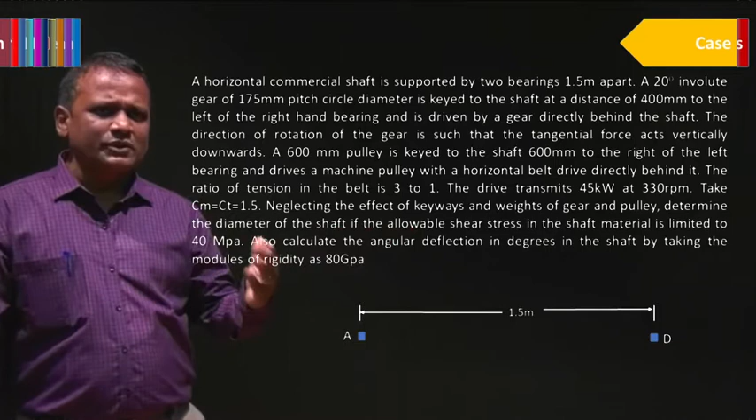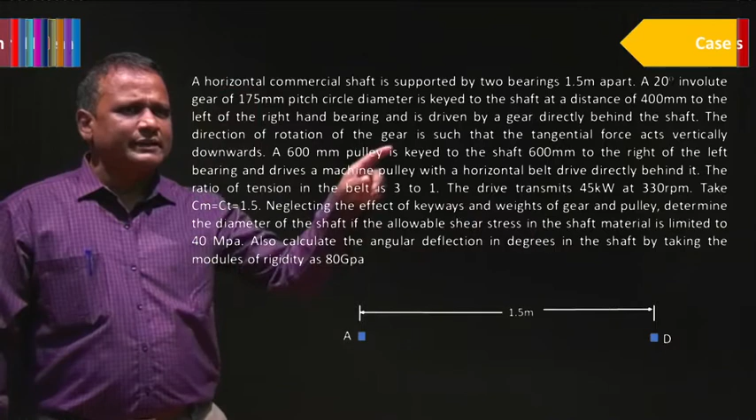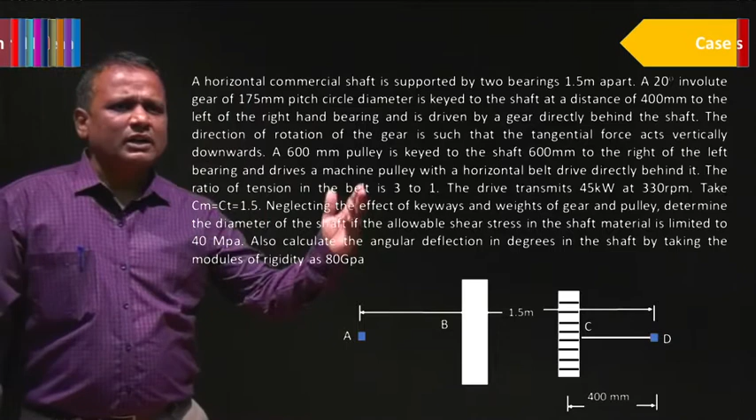Next, a 20-degree involute gear of 175 mm pitch circle diameter is keyed to the shaft at a distance of 400 mm to the left of the right hand side bearing. I consider this as the right side bearing, so to the left of that, around 400 mm, we have one gear. I call it gear C, at 400 mm. Further, a 600 mm pulley is keyed to the shaft 600 mm to the right of the left bearing.

I consider this as the left bearing, so to the right of it, the pulley is keyed at a distance of 600 mm. So whatever is left back would be 500 mm. Okay, so this is an initial sketch of the system.

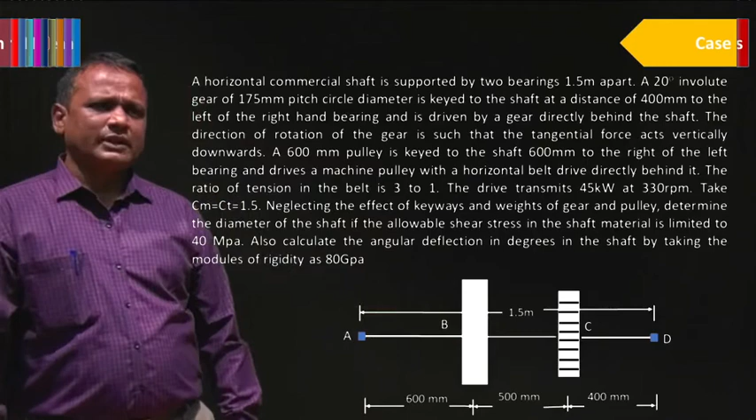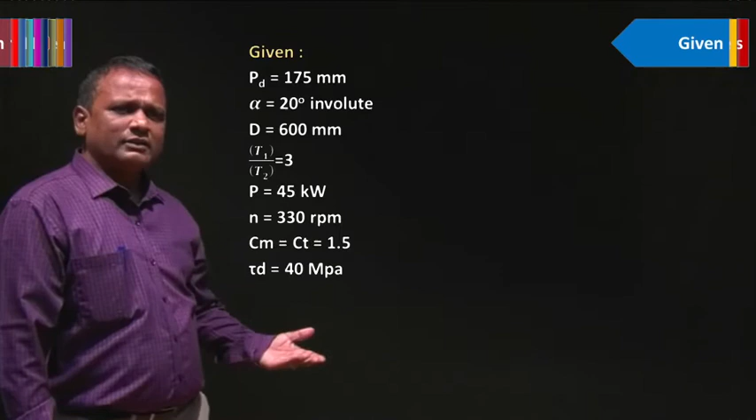Next, the givens: pitch circle diameter of the gear is 175 mm, alpha is 20-degree involute, and the diameter of the pulley is 600 mm. The tension ratio T1 by T2 is equal to 3. Power is given as 45 kilowatt and speed N is 330 rpm, with Cm and Ct equal to 1.5, tau D is 40 MPa, and G is 80 GPa. And what we need to find is D and theta.

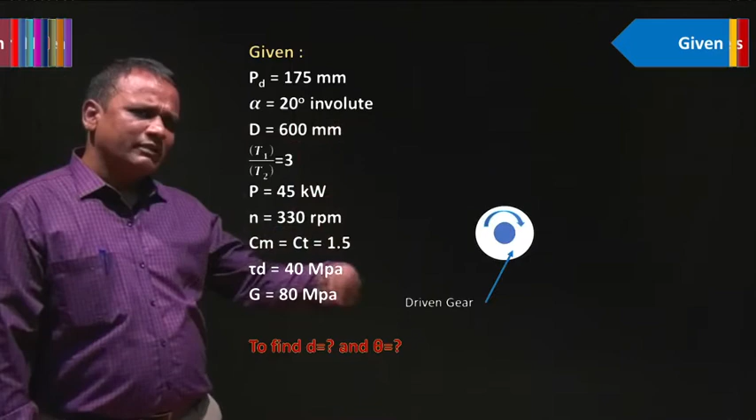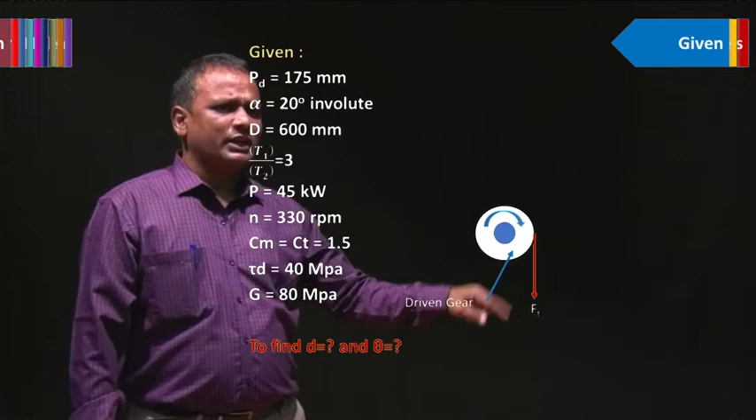Now, remembering the given data, I'll draw the side view showing the gear taking power, with the tangential force acting vertically downwards. It's a driven gear, the tangential force is vertically downwards, and correspondingly the radial force is towards the shaft.

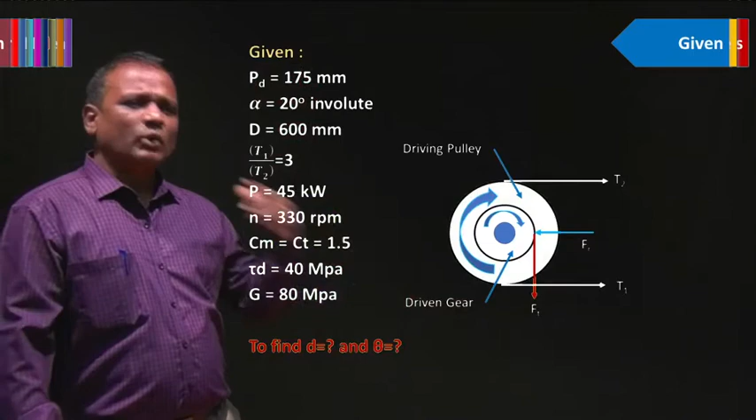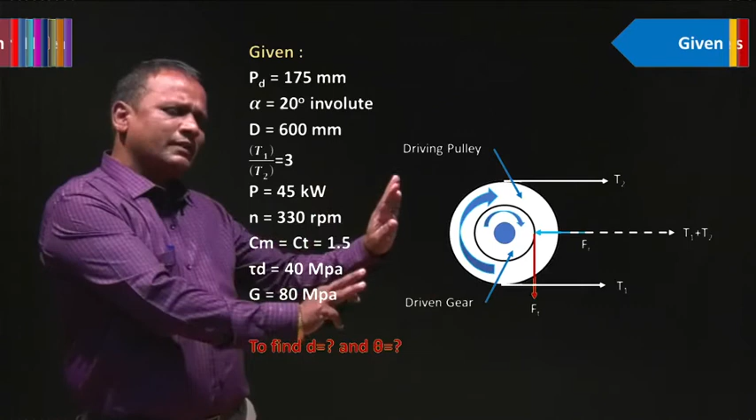Then I added a pulley delivering power to another pulley directly behind it, with tensions T1 and T2 respectively, and the summation of those two would be T1 plus T2. From this sketch we can conclude at least how many types of vertical forces we have, and what horizontal and vertical forces will exist in this case.

So next comes the solution. As I said, in deriving the diameter of a shaft, I use this particular equation based on maximum shear stress theory, from page number 43.

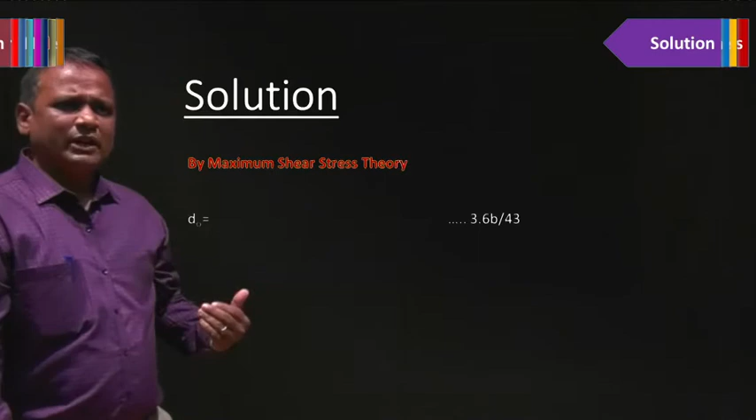So I am going to consider the maximum shear stress theory, equation 3.6b. I know D naught is equal to the same equation 3.6b of page number 43. And we know that for a solid shaft, K is equal to 0.

So remodulating this equation, what I got is this. This is the equation I am going to use in order to find out D. In fact, I will find out all the other unknown elements, where tau D is given, Cm is given, Ct is given, and I have to find what is M and T.

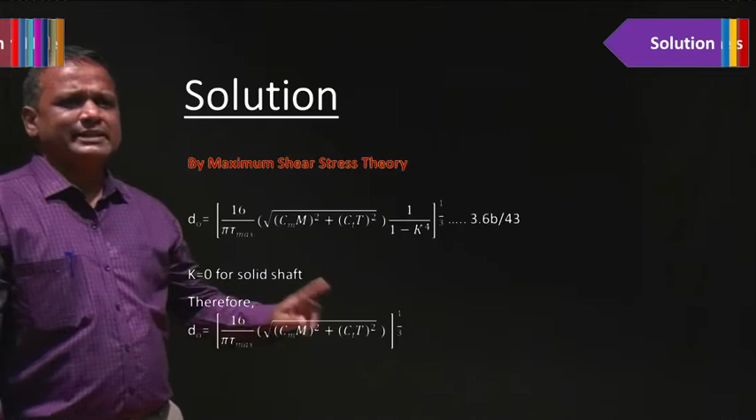So the next step is to find the torque. You know that from equation 3.3a of page 42, the same equation we used in our previous videos, it says 9.55 into 10 to the power of 6 into P divided by N. Kindly note, very important here, P needs to be substituted in terms of kilowatt.

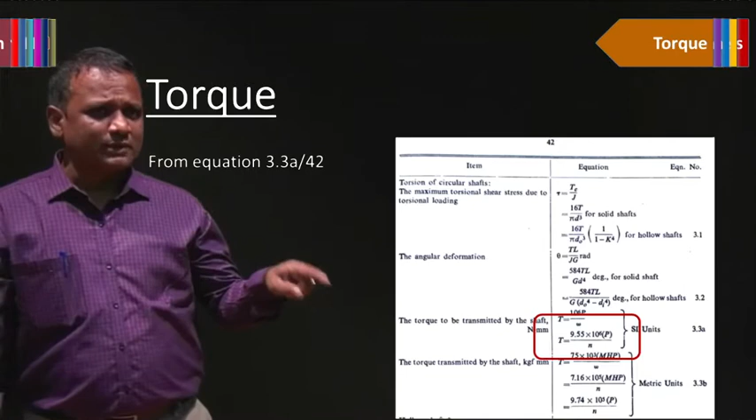So I'm going to pull down the same equation here. Now substituting everything into it, the torque that I got is 1302272.727 Newton mm for this case. So this is the torque.

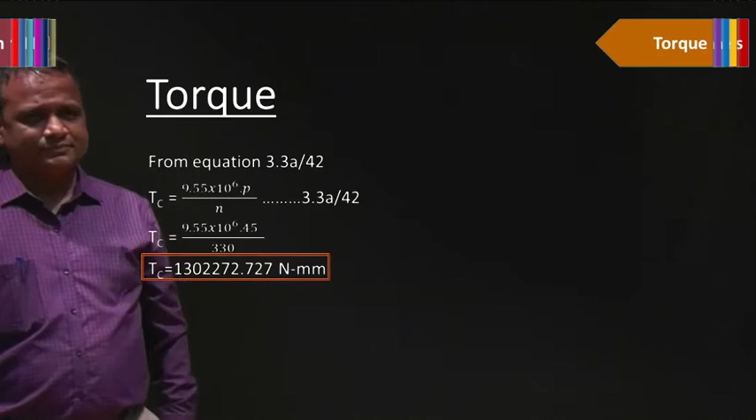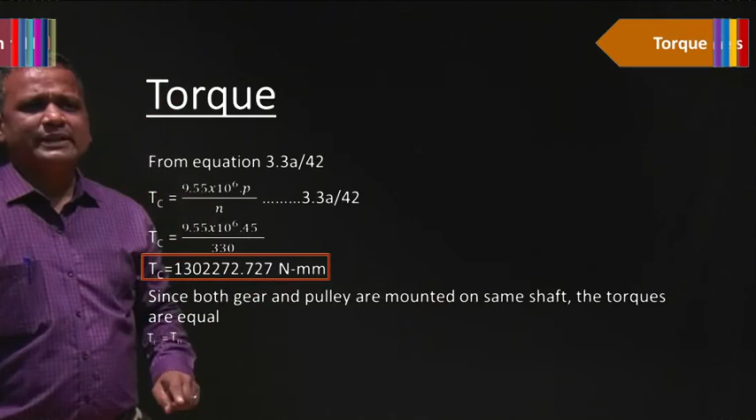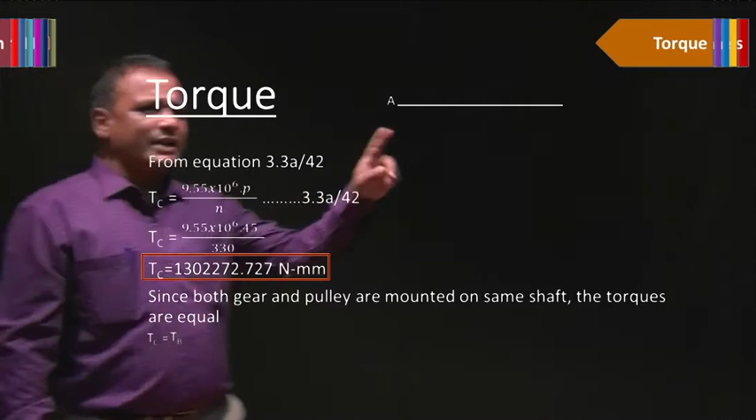We know that both systems are loaded on the same shaft, so therefore both torques are the same for the gear and pulley. So TC will be equal to TB, as you can see here. So further, in order to draw the torque diagram, since TC is equal to TB, the value remains the same. So this is point A, straight line point A, and point B, and point C, and point D.

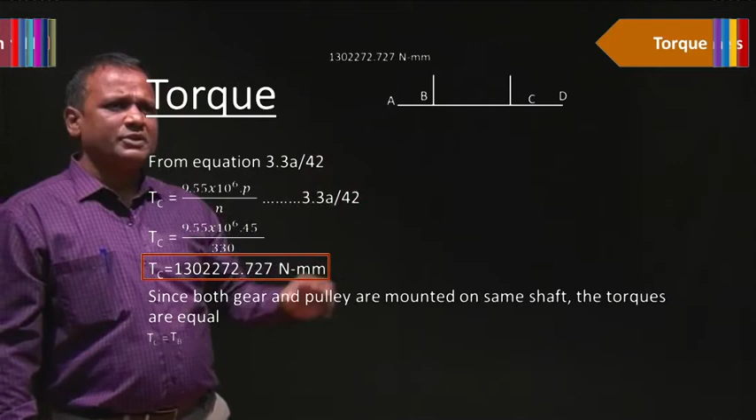You know that the torque at B and C stays the same, so a vertical line of the same dimension, then join those, and you get the torque diagram you need to draw. So further moving ahead, for bending moment, I need to know all the horizontal and vertical forces.

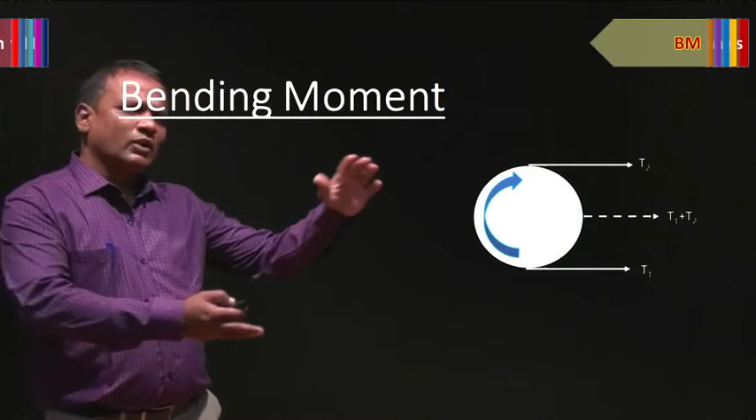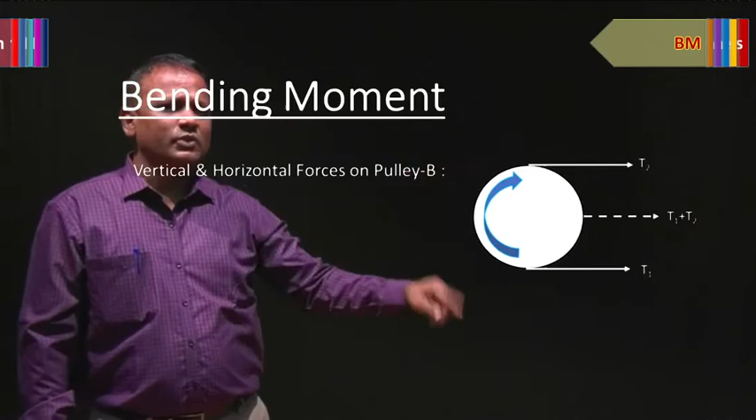So for the vertical and horizontal force at pulley B, there won't be any vertical force since it's clearly given to neglect the weight of the pulley. So therefore we won't consider that. So only the horizontal forces, you know T1 and T2, the summation of those two would be T1 plus T2. So this is the one.

Horizontal force at B, FHB, is equal to T1 plus T2. And you know that the torque at B is TB, where TB is equal to TC. The general equation states TB is equal to T1 minus T2 into D by 2.

Now substituting all the values into it, I can clearly come out with the values for T2 and T1. The T2 I got here is 2170.4545 Newton, and T1 is 6511.3636 Newton. So the summation of those two would be the horizontal force, which is 8681.8181 Newton, and the direction is towards that side.

So this is the direction. You can see here the direction of this and this remain the same. Now further moving ahead, the vertical loads at this pulley - can you see any vertical load here? None, since it says neglecting the weight of pulley. So therefore I will be neglecting that, so the vertical load is 0.

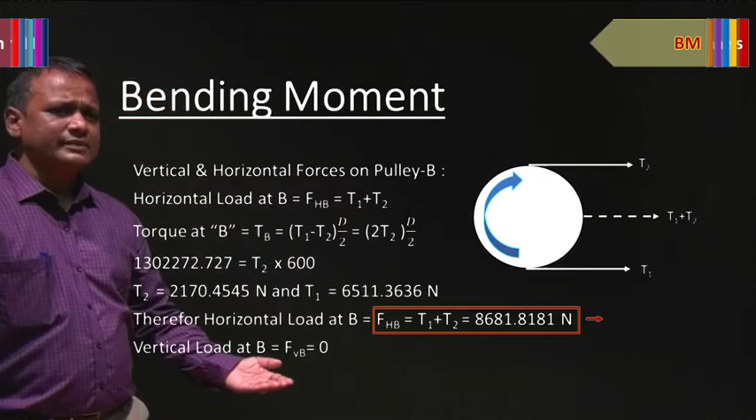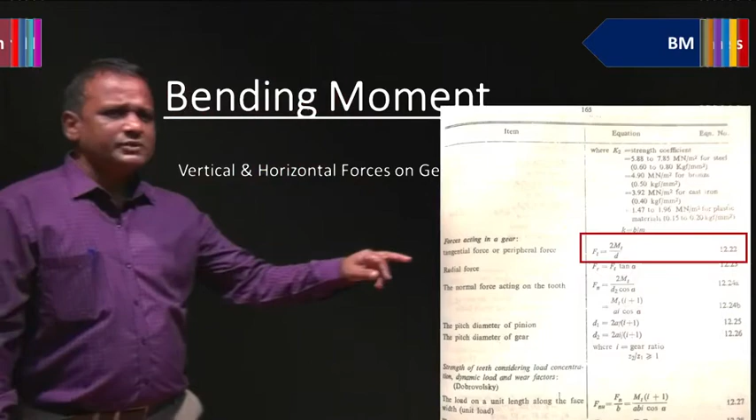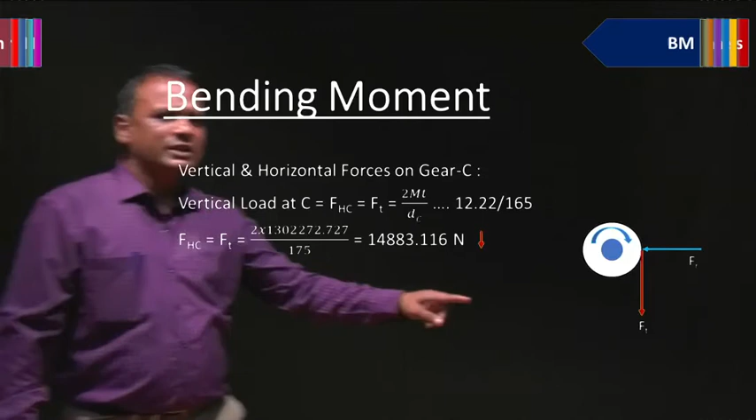So what will be the vertical force? Ft is equal to 2Mt divided by D. Now I can pull down the same equation here, and if I draw this, the vertical load at C is FHC, or we call it Ft, which is 2Mt divided by dC. Now substituting everything into this, the value I got is 14883.116 Newton, and you can see the direction here, and the direction I took here would be the same.

Now further, for horizontal momentum, you know Ft into tan alpha from the equation. So same thing I'm going to pull down again. So the horizontal load at C would be FVC is equal to Ft into tan alpha. Now substituting, you know Ft is known here and alpha is given.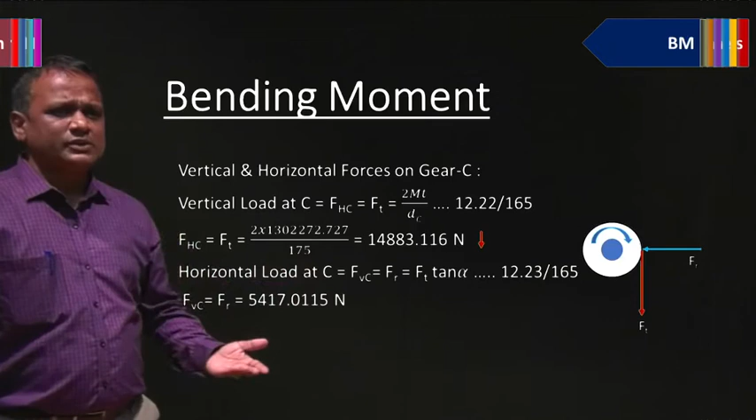Substituting everything into this, the value I get is 5417.0115 Newton, and the direction is given there, same direction added over here.

Now once we know the vertical forces and horizontal forces, to find the vertical bending moment I consider a shaft with length A, B, C and D. B is a point where we have a pulley, and C is the point where we have a gear, at distances of 600, 500 and 400 mm. These are the two bearings, A and D.

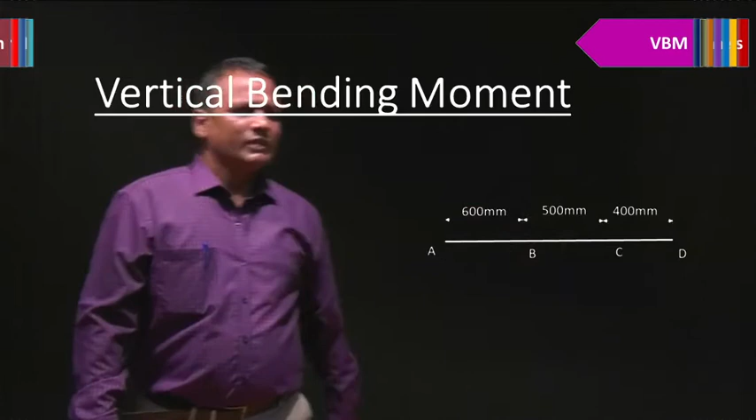We had already derived a vertical force at point C, and we don't have any vertical force at point B, so I didn't draw any force there. Now the reaction forces are RA and RD at both ends.

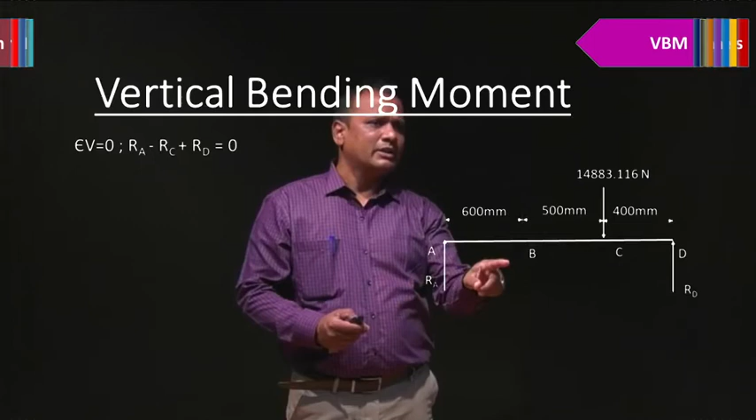Now to find out, we know that the summation of all the forces - what are the forces moving up? This one is moving up, and this force is going downwards. So what goes up I consider plus, what comes down I consider minus. Therefore the summation: RA, I don't have any RB so this is coming downwards, so RA minus RC plus RD equals 0. This is the equation I've written.

Now taking the moment, summation of moments at point A - what will be the forces? You can see RA plus RD equals the value I got, because I know the value of RC. Now summation of this moment, as the equation I've written there.

So only one force here, which is 14883.116 Newton, going in clockwise direction toward this point. Clockwise direction I consider as plus, into 600 plus 500, which comes to 1100, written over there. And RD rotates anti-clockwise toward this point, so minus RD into 600 plus 500 plus 400, which comes to 1500. This is the equation I've written here.

Hope you understood this - clockwise, this load into the distance, here again RD into distance. What equation do I come up with? From this equation I can conclude RD and RA values, so I will write down the RD and RA values over here.

Now to find the bending moment at particular points, I draw a similar length diagram. This is the bending moment at point A, which is 0 since there's no force there. So this force into distance, minus the last force RD into this distance, should be 0. That's what's given there.

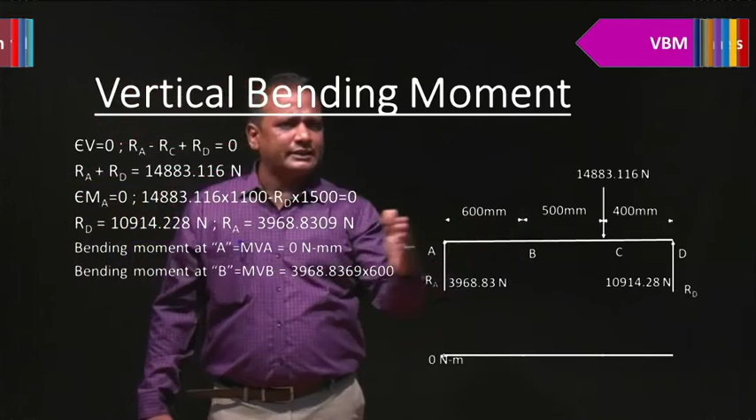Now at point B, I consider either all the forces on the left side or the right side. At this particular point I'm going to consider this force: 3968.83, since it rotates clockwise, into distance 600 mm. That's what's given here. Doing this calculation, the value I got is 2381295, which I mark above as a plus.

Now at this point, as I said, I consider either the left side or right side forces. If I consider the left side forces, you can see RA 3968.83 into 600 plus 500. It's clockwise, so I consider this as plus toward this point. That's what I did here, and the value I got, I mark over there.

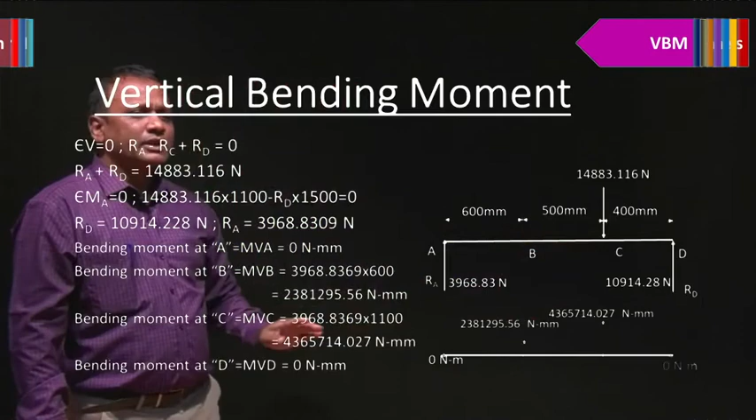Now similarly at point D, the sum should be 0. Now joining all the lines over here, and documenting it, this is the bending moment diagram we get for vertical forces.

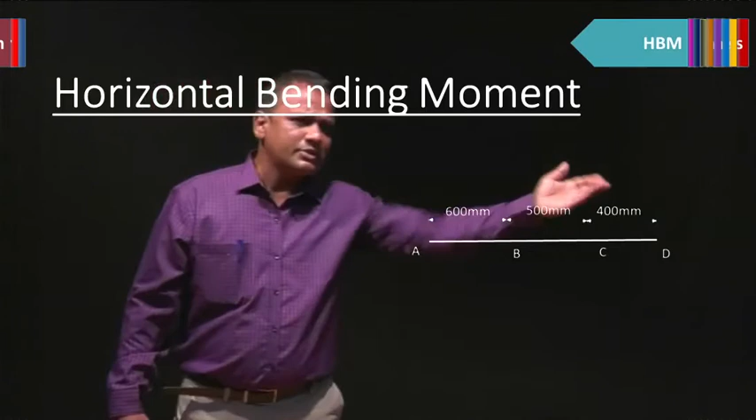Next, in a similar way, to find the horizontal bending moment, I draw again a line - a shaft of certain dimension with A and D as the bearings, B as the pulley and C as the gear. Now I know the horizontal moment force at point B would be 8681. If you remember, the summation of T1 plus T2 is the value I wrote, and another would be C.

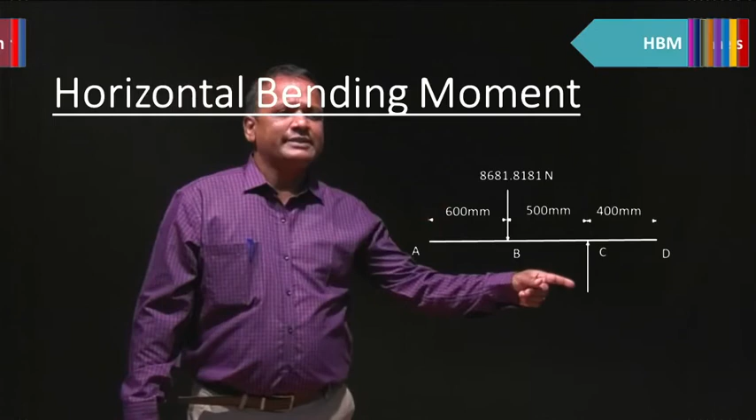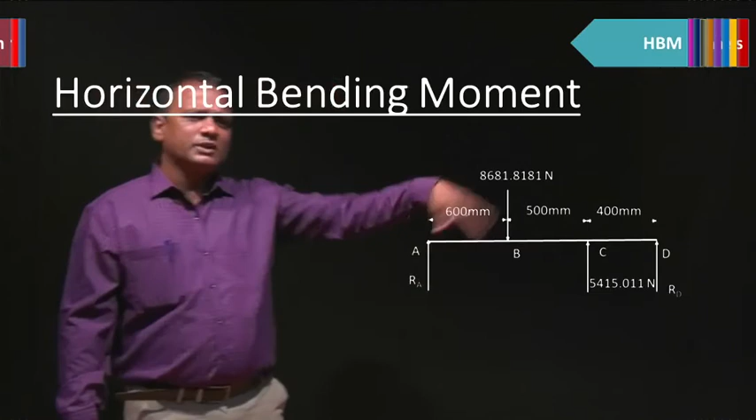This is another horizontal force which will be derived, which is 5415.011 Newton. Now similarly the two reaction forces, one is RA and another one is RD. Summation of all the forces is equal to 0, the same equation as before. Upward direction RA minus RB plus RC plus RD, this is the one. So RA plus RD, what I got is this.

Now taking momentum at this point A, as I said that at point B, 8681 into 600, since it is clockwise, I can consider this as clockwise towards this point. At point C, it is anti-clockwise which will be moving towards point A. So I call this 5415 into minus 5415 into 500 plus 600. Again this one is anti-clockwise, so RD into 400 plus 500 plus 600. That is what I had given over there.

So while solving this, what I got for RD and RA is, RD I got a minus value, minus 498.2811. So I am going to change this RD value, right? I can remove this. So since the initial assumption is wrong according to this. So then RA is 3763.087. So this is what value I got.

Now in order to find the bending moment over here, similar to what we did in vertical bending moment, the line over there is similar to that shaft over there. So bending moment at this point should surely be 0.

Now when it comes to bending moment at point B, as I said, I will be considering either the left side or the right side. So I will be considering at this particular point the force over here, which is 3763 into 600, right? So it is a plus. So this is what the value I got. So for which it will be 2257852, which is plus again. I am going to mark it over here.

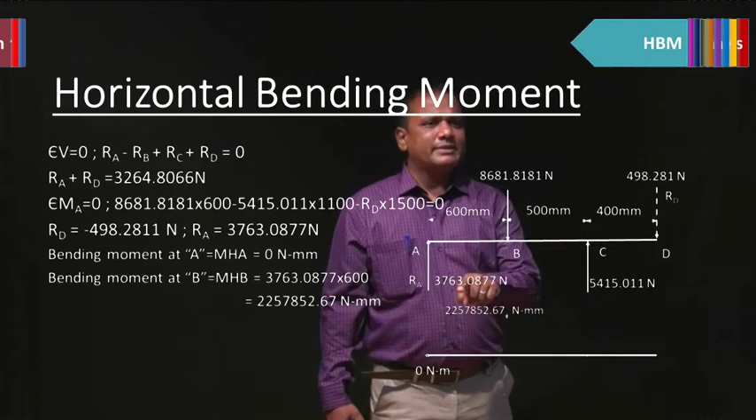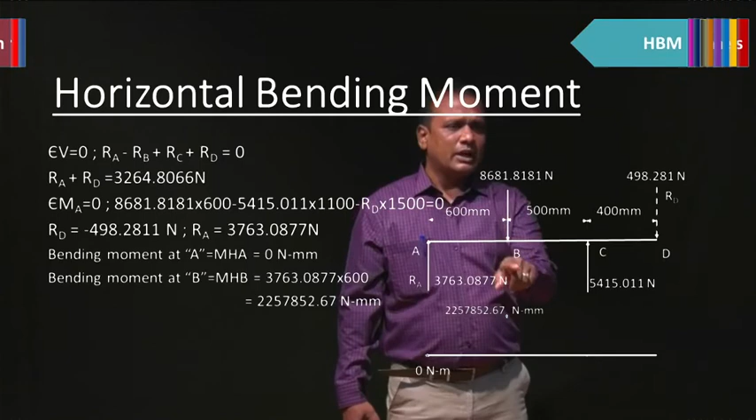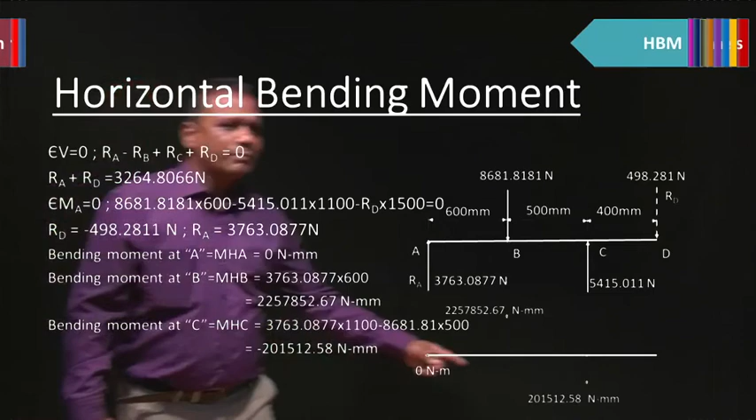Now at this point C again, you can see here: 3763.0877 into 600 plus 500, minus, since it is anti-clockwise over here at this point, which will be 8681 into 500, minus. So that's what I can do over here. I modified the whole equation. So while doing this, whatever values I got is minus 201512. So I am going to mark it minus since below this line, it is minus.

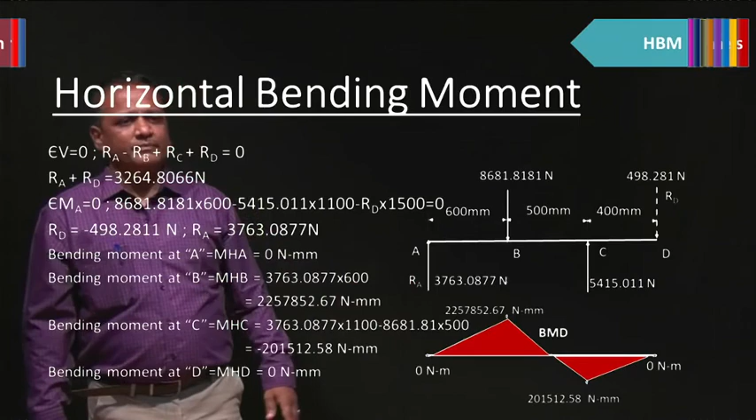Now surely at D it should be 0. Now joining all these lines, what we had, and shading it out, this is what represents the horizontal bending moment. Now once we know the vertical and horizontal bending moment, next would be determining where we have a maximum bending moment, whether it's in vertical or horizontal. Let's try to analyze this.

So for the resultant bending moment at point B, we do know that we have one maximum bending moment at vertical and one at horizontal. Then the equation would be MB at that point is the square root of MVB whole square plus MHB whole square, that is vertical and horizontal bending moment at this point. Now substituting all the values over here, what I got was the moment is 3281536.

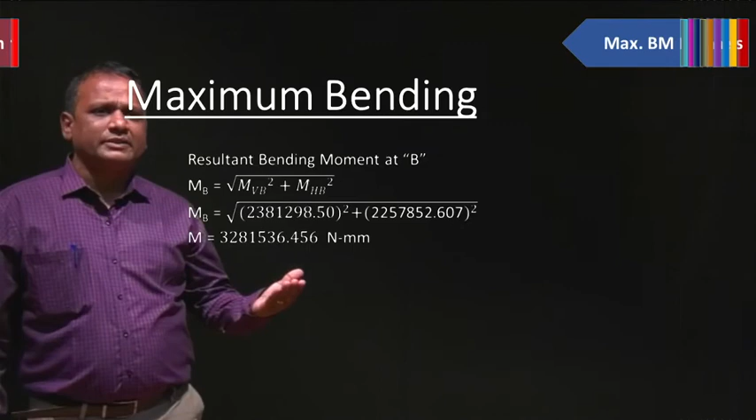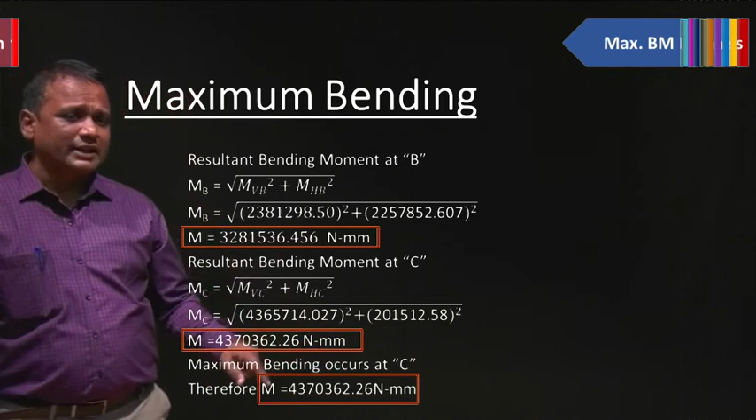In a similar way, the resultant moment at C, now substituting again all the values with the same equation, right, what all I got is 4370362. Whichever is the maximum, that will be considered the maximum bending moment. As you can know very well that the maximum bending moment surely will occur at C. So therefore, the moment that I am going to consider in order to design this particular case is 4370362.26 Newton mm.

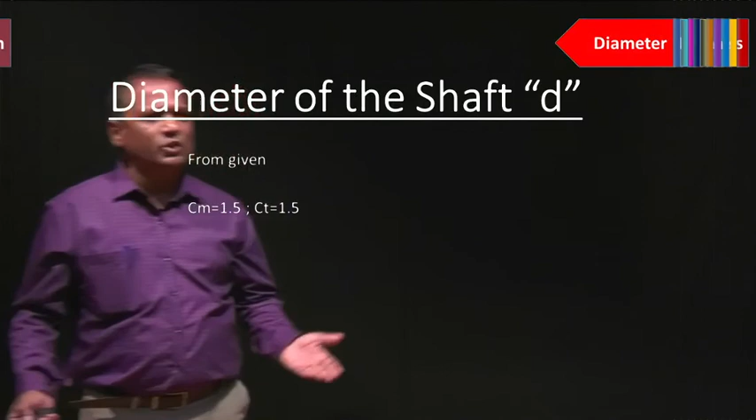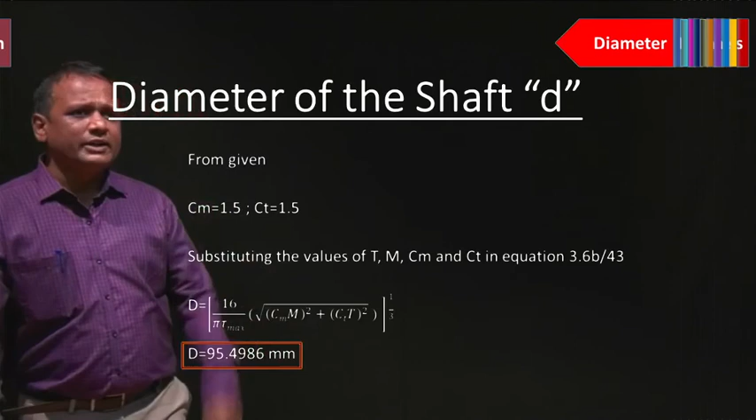So once I know this, I know the basic equation of the diameter of shaft. I will substitute all the values, as CM and CT are already given to me. So now substituting everything into this particular equation, whatever diameter that I got in this particular case is 95.4986 mm. So in this case, one more thing needs to be determined, that is angular deflection.

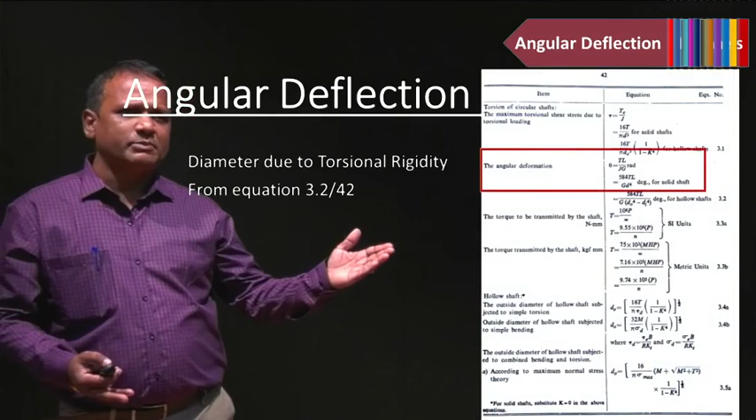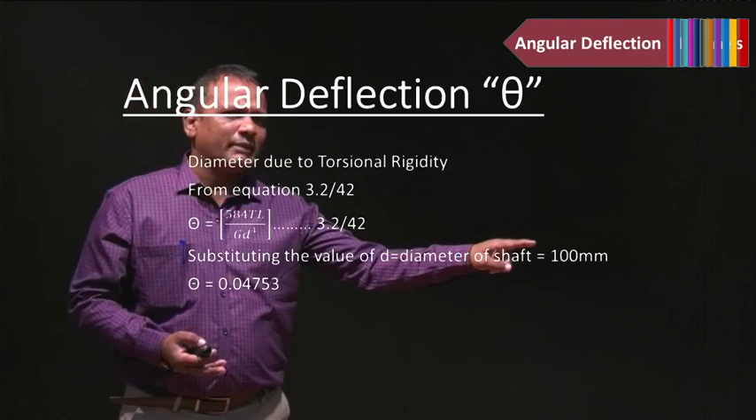This angular deflection can be derived directly from an equation, which is equation 3.2 of page number 42. As you could see here, the equation 3.2, what it says is theta is equal to this equation. Now you know all the values given over here; substituting in this particular equation, the value that I got is 0.04753 degree. So you can see here, the shaft diameter I have assumed is 100 mm, because in the previous case it's 95 point something, so I'm going to approximately take it as 100 mm and substitute that value. So this is the angular deflection we had.

So this is how the case is to be solved when the gear and pulley have been loaded on a single shaft. Thank you.